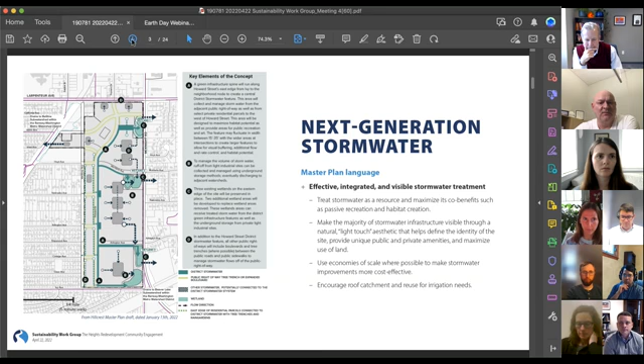Yeah. Bob, do you want to? Oh, I wasn't sure about the map. I don't know that folks are familiar with the concept. The schematic. So explain the schematic in a minute or less. It's like a game show.

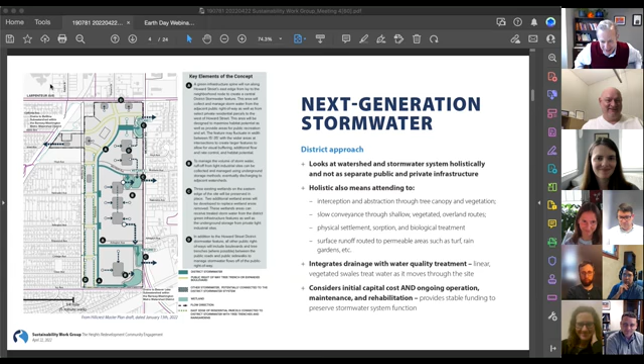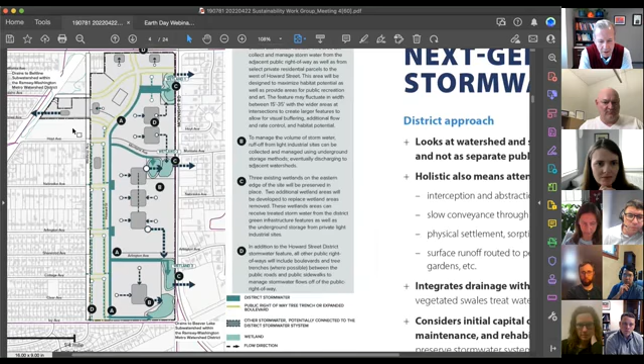I'll try. So, I mean, this came out of the master plan. It was actually to conceptualize what the thematic elements within the system would be. So on Arlington and Howard Street, you'll see a linear feature, and that's really a BMP, right? It's a combined conveyance and treatment BMP. Now, what's interesting about that for us is that by combining conveyance and treatment, we really accomplish two things at the same time. But we do have to be a little bit careful about not overemphasizing conveyance and not accomplishing the treatment we want.

So on Montana, Howard, and Arlington, you see those features. We also have a lot of underground storage. We have a realization that in creating industrial space, there's a certain amount of pavement and building that just needs to occur. And so within the master plan, there was a decision to also indicate the need for underground storage. And they roughly proportion what that might be. Now, underground storage in some locations might have infiltration associated with it. In other locations, maybe not. And we're actually currently looking at where that makes the most sense.

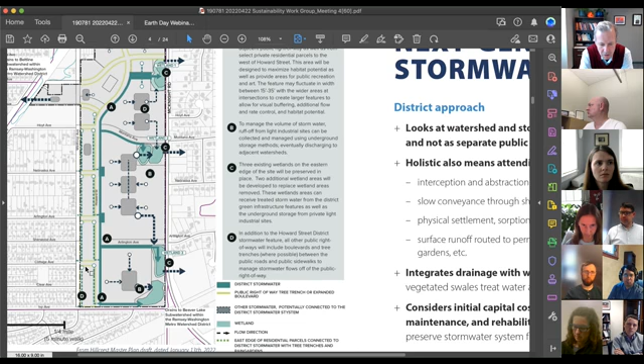Generally speaking, toward the southwest part of the site, infiltration is more available to us. And then toward the northeast part of the site, the east and north, not so much. Now, some of you may say, well, there's contamination on the site. So we are going to have to work with the PCA, the watershed, and the city to understand their tolerance for, after we remove the contaminated soils, are we free and clear to pursue infiltration where it makes sense? And we think that we will be, particularly since some of the infiltration areas don't have contaminated soils.

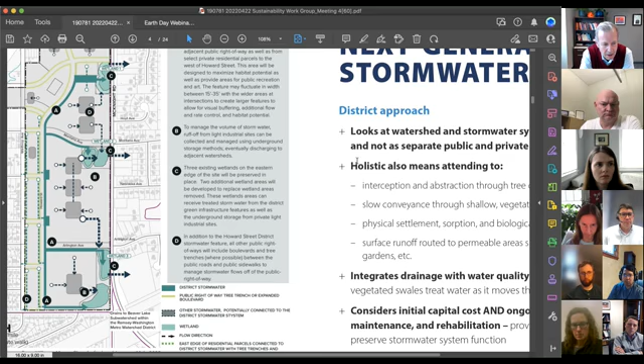So you see those gray areas are really a schematic of where underground storage would occur. And then, of course, we have wetlands on site. And wetlands, I don't say they're not part of the treatment system. Regulatory agencies will say you have to treat upstream of a wetland, but a wetland can serve to polish water, I call it, just to kind of finish it up, to really add an extra level of resiliency to the system. So we do rely on the wetlands to provide those functions, and really we have to maintain hydrology of the wetlands. And then we have surface ponds as well as part of the system.

What's not shown are what I would call the small scale BMPs that will be integrated into the site. And those could be tree boxes, rain gardens, rain gardens in parking lot islands, all of that would also be part of the system and integrated into it. The one concept here, though, as we look at this, is that the public realm and the private realm are mixing their water, right? And that's not always done. And so that's where we come up with the concept of district stormwater.

District stormwater for us is really the idea of what is the most practical way to move water and treat water without thinking too much about the boundary between the public and the private realm. What we're trying to do is be practical and holistic and not so much think, well, the municipal system is here, the private system is here, let's separate them. We're trying to be more efficient to get more treatment out of a certain amount of expenditure. And that lends itself to the district concept.

And a district really means, I mean, it's a philosophy in some sense, but it's also a financial structure. In a district, we identify what those combined costs are going to be in the public and private realm, and we attribute them to the development. And then we make sure the stormwater utility, a special district might be created in the stormwater utility that funds those activities and the maintenance of them long term. And that's really the idea.

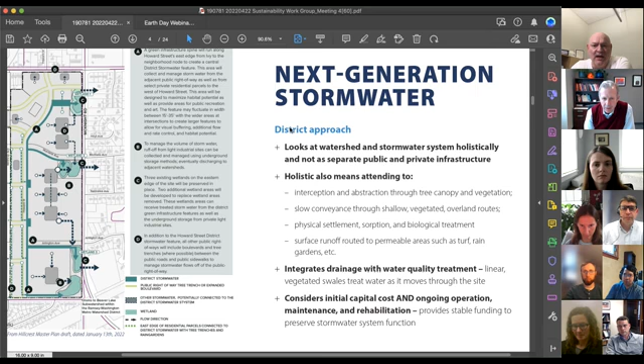Yeah. Should I keep on to the next slide then, Becky?

So we'll talk just a couple minutes about the practices. Every engineer comes at this with a preference for certain practices. We try to be open-minded on it. Obviously, there is large-scale underground storage on industrial sites. That's a very practical way of going about it. At the small scale, we have tree boxes and rain gardens. That's a little bit more of the aesthetic, though there are treatment aspects to it.

Permeable pavements are one that gets to be a little tricky. This is sometimes where the meeting of the minds is; I think we kind of align with Public Works on this, that we haven't had a great record of using them in the highly trafficked right of way, and anywhere where we have a lot of turning movements. They tend to degrade and perform poorly, but there's a place for them in other areas where we might not have a lot of turning movements or traffic, and certainly in plazas and public spaces where it's all pedestrian and bike traffic.

So there's a place for them, and I think what you'll see in our designs as they come forward is that we're not putting them in where we have an industrial development with a lot of trucks running. We're probably not going to be seeing a lot of permeable pavement on the roadways, but we would be seeing it and looking for it in many, many other areas.

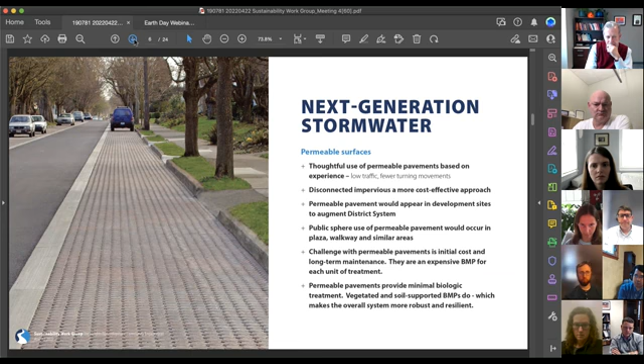You can go to the next slide, Becky, which I think is contamination remediation. Still me. Monty, I didn't know I had this much material. Becky, you really stretched it out.

Thank you. So contamination remediation, I talked about needing to be careful with infiltration when we have contamination. And there's the practical of being careful, right? You have contamination. You don't want to drive contamination into a groundwater table. And so when we do infiltration, we're mounding up water, we're increasing the hydraulic gradient across the vertical plane, right? And we can drive water into sand beds or just veins and then drive pollution deeper into the soils. So we have to be careful about that.

When we can't infiltrate because of contamination, we actually have an augmented water quality standard that we have to achieve by Ramsey-Washington Metro Watershed District standards. So when you can't achieve infiltration, you have to just provide more retention, more volume for treatment. So in areas where we can't infiltrate, we'll have to do that. But that said, we are stripping all the contaminated soil. Most of the sites I work with, we can't get at all the contaminated soil, right? It's deeper down or it's in the groundwater. We're dealing with a plume. So we're stuck, we can't infiltrate.

But here we have access to all the contaminated soil. Right, it's all at near surface. It's all in the fairways and the greens and the tee boxes, and it's within the first 24 inches of the soil. So we do have access to it. So working with the PCA, primarily Department of Ag, city and watershed, we're thinking, in areas where it's appropriate, we can get infiltration into the development.

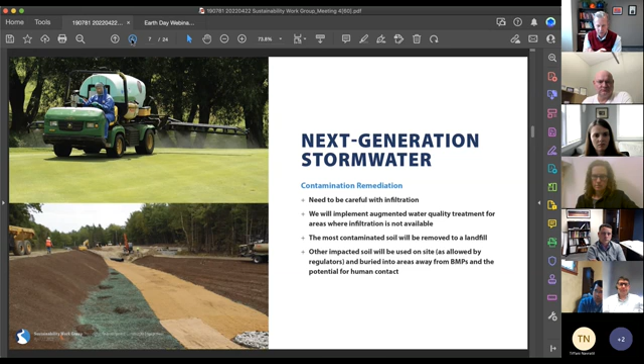Bob, this resilience and adaptation slide, I think, jives nicely with Chelsea's comment in the comments here, wanting to hear about strategies for drought resilience. So if you or Bill, while you're going through this slide, can be thinking about that in the back of your brain, I think that would be great.

Hey, Jess, thanks for joining us. Thanks for having me.

So resilience and adaptation, in terms of flood prevention, our standard is known as Atlas 14. Now, your guess is as good as mine as whether it's getting rainier over the period of record that Atlas 14 is based on, but it is a 7.4-inch flood event, and has proven to be robust. Bill and I have had probably, Bill, 5 years of experience now applying the standard. So we've seen some of the infrastructure built that we've used to design to this standard, and so far so good, right?

We used to design to the 6-inch event. Some areas of the metro was 5.7 inches. So it is quite a bit more robust. So that resiliency is there. The other thing I was just going to say, Bob, we could add in, flood protection in where we put flood storage areas or define flood storage areas is a component of resilience. But another component of resilience is just in best practice of site design, right?

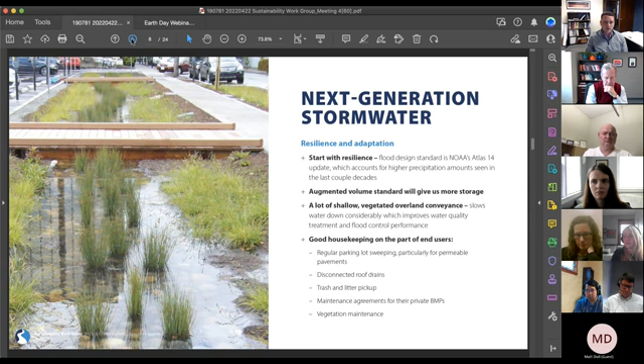Like if we put something underground, are we putting the appropriate number of clean out structures or access points? Can somebody get in and maintain it to continue? Because spending all this money on infrastructure that only lasts 5 years and then becomes ineffective doesn't achieve anybody's goals. And so using that O&M lens and asking those questions of the crews who are out there maintaining them, how can we design this differently or better, and keeping how they're actually going to keep these things operating in mind is important.

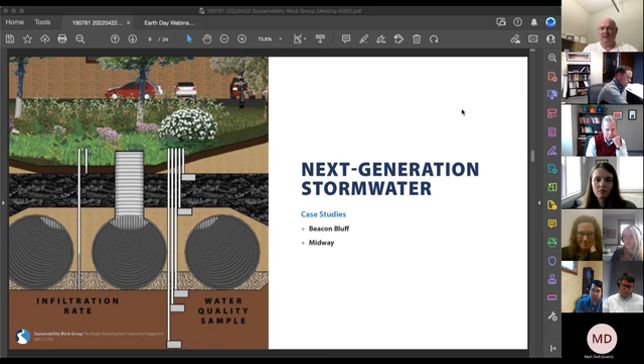Thanks, guys. I'm going to fly through a couple of case studies here. Let me just open them up. And Monty, I'd say we are running a little bit behind, so if you want to speed through them.

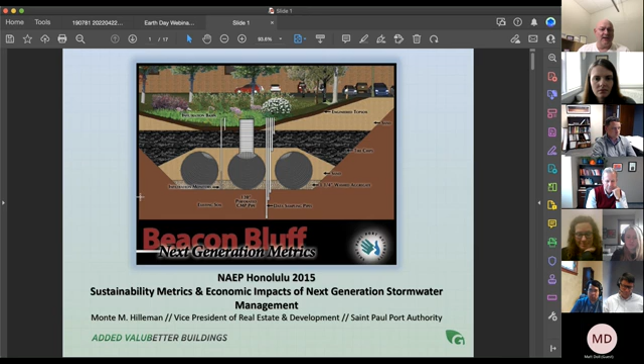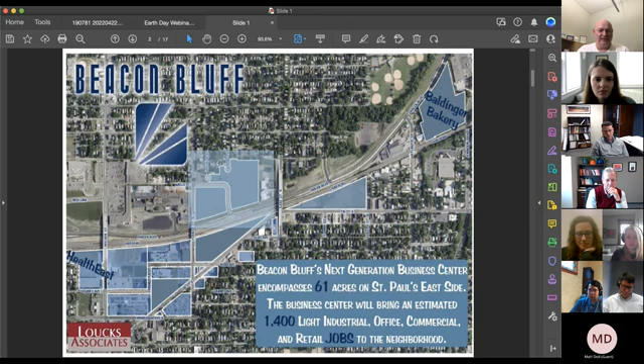I will be quick. 2 different projects, our Beacon Bluff project and giant utility scale system, and then an industrial scale system at our Midway project. I haven't done this slide for a little bit, but this was a presentation I did for the National Association of Environmental Professionals in Honolulu in 2015. Beacon Bluff was our last 10-year large-scale redevelopment project, 1,400 jobs on 61 acres. This is the site we're going to drill into right here.

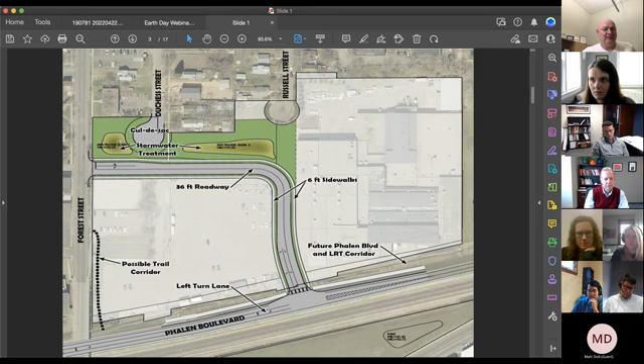There were some old 3M buildings, and a contaminated foundry was buried under these old 3M buildings we had to clean up. We had to build this road to create 2 nice development pads. And to build the road, we had to build some treatment to deal with the stormwater coming off the road. Well, what we realized was, right about where that treatment wanted to be was the creek bed of the old Phalen Creek that was eventually buried and put into a brick tunnel that drains right into Swede Hollow Park and then right into the river.

What we realized was this is all down gradient. The Beacon Bluff site is down gradient from this 143 acre sub-watershed district. So this is 143 acres of largely residential, small scale commercial, basically untreated urban runoff that was going into bigger and bigger pipes. By the time you got down here, there's a 4-foot pipe that went into the 8-foot brick tunnel from 100 years ago and dumped right into the river.

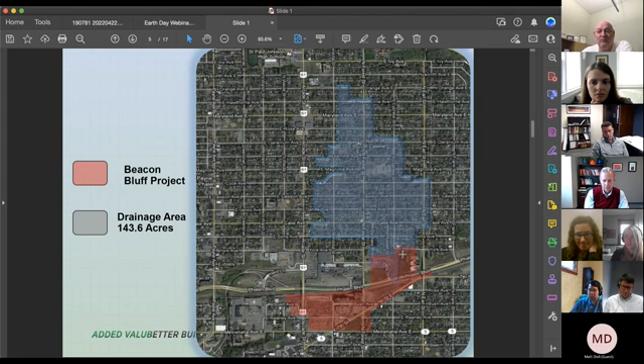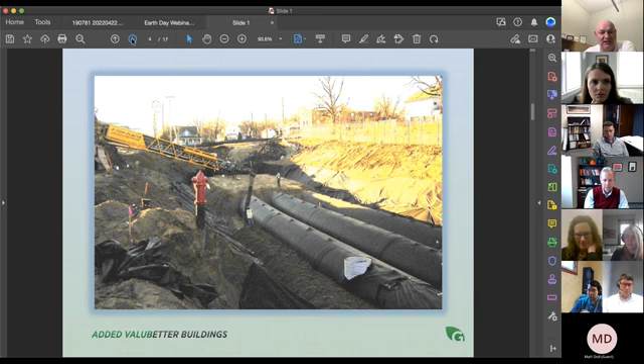Well, that creek bed was some beautiful sand we could infiltrate into. So we built this utility scale underground infiltration system and got the city comfortable with it. The storm sewer folks were not super excited about it at the beginning, but we got them there. It is perforated 10-foot diameter pipes, wrapped. Different types of soil media were used, sand and aggregate, to both hold up the pipes and to provide filtration.

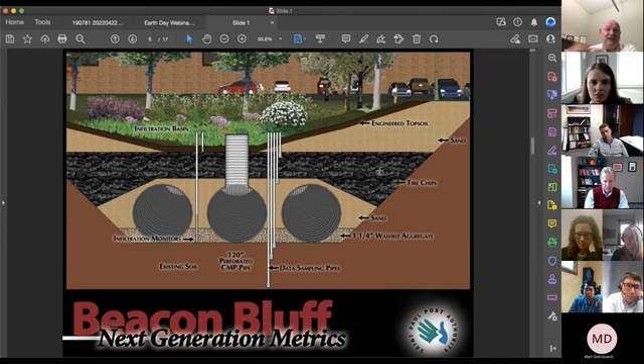Tire chips, what's called TDA, tire derived aggregate: there's a PCA standing beneficial reuse for tire derived aggregate as a waste product. And if manufactured to a certain spec rather than put in a landfill, it has a lot of void space, so you get a lot of storage capacity in order to, as Bob was saying, slow down that 143 acres of runoff in a surge event. And then it's all infiltrating down into the beautiful sand below the system.

But when we were trying to get this thing permitted, we were having some issues related to policy and science about how we understand how stormwater works. There's really a dearth of data internationally about how these underground systems perform over time and what the environmental efficacy of them is. And so we went down a rabbit hole that we're still going down on researching, providing research opportunities to create better policy around stormwater.

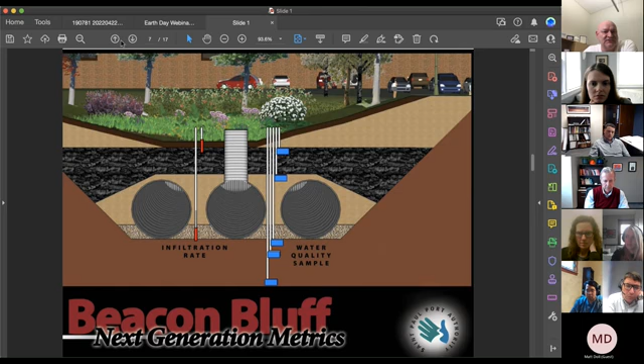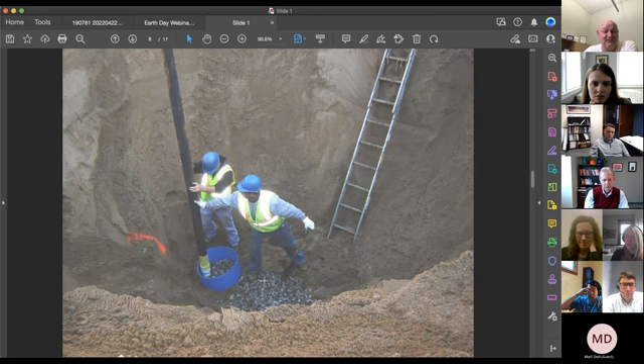We inserted infiltration rate monitors, these collection tanks for water quality sampling, these things right here. I mean, where'd they go? Oh, they're coming up. We literally invented these sitting in the construction trailer, trying to figure out how to get these pipes and get the water, collect the sample we need. This thing, the bottom one, is like 12 feet below a system that is 20 feet below ground. So you were never going to be able to build this after the thing was built. You had to build these deep sampling pipes ahead of time.

This was the first site to use a SAFL baffle. It was invented at the University of Minnesota at the St. Anthony Falls Laboratory, hence SAFL baffle. It's a stormwater device you put in a manhole. I liken it to shooting a garden hose at a cheese grater. It really disperses the energy, and Bob and others will laugh because that is not actually how this thing works, but kind of. It interrupts the scour, the swirl in one of these manholes, which picks up the sediment and pushes the sediment downstream. That's what these SAFL baffles do. This, like I said, was the first installation, and I believe this is now standard practice at Cap Region Watershed District to require SAFL baffles in manholes to some extent.

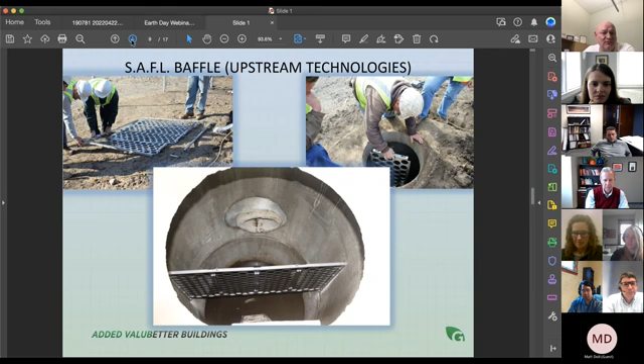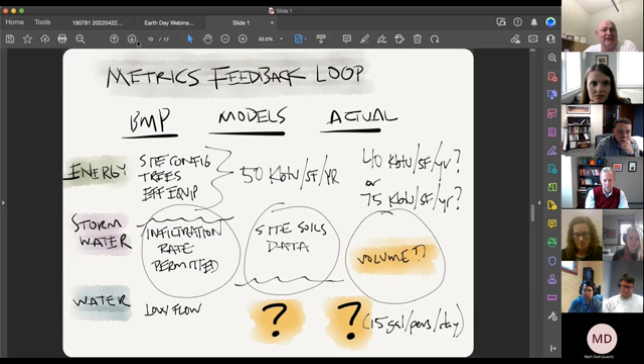This is a whole thing about metrics feedback loops and the idea that we have BMPs that say we're supposed to do good stuff with stormwater by infiltrating it. We do modeling and we get some site soils data, but then we don't do a lot of actual metrics. Cap Region Watershed District has several monitoring sites. Two of them are ours. Ramsey, Washington, where this watershed district, where this site is located, I'm not sure. We haven't gone down this rabbit hole with them. But it seems to me that most watersheds are interested in sites where they can monitor and analyze and get real world metrics feedbacks from these types of systems.

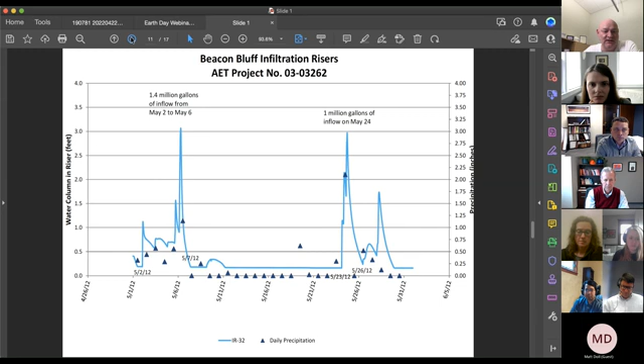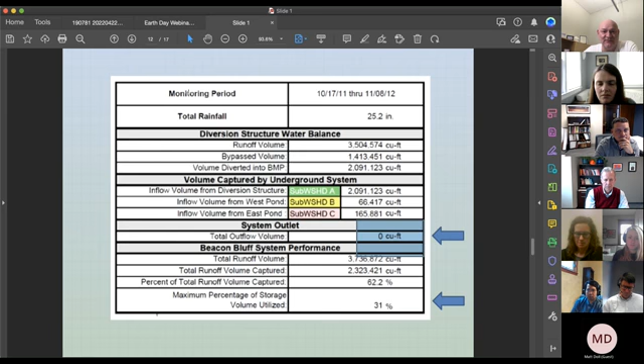This is our infiltration rate monitoring. You can see that in one day rain event, we inflowed 1 million gallons in that system on May 24th. And this was 2012, it looks like. You can see here the system outlet, total outflow volume, 0 cubic feet, meaning everything that came into that system was being infiltrated and recharging the aquifer. So when we talk about stormwater, we talk about ecosystem services. And what are the valuable ecosystem services that stormwater help us hold up? Aquifer recharge is a big one, right? Water quality.

This next slide will talk about the speed by which we are transferring surface water contaminants to groundwater. And these are things that I didn't understand when I started working on this stuff, but some of the folks at St. Anthony Falls Lab and some of the other scientists have taught me a lot about, and we got into a partnership to study these systems. Now we're working with the Pollution Control Agency and the Watershed District, where the PCA is providing lab time and lab analysis. The watershed is providing the labor to go collect the samples. The Port Authority is paying for the instrumentation of these systems.

So the University of Minnesota, Met Council spent, this is Dr. Gulliver's work, Met Council spent about 400 grand with U of M studying this system. I tried to present this to the National Association of Environmental Professionals, not being a scientist, but we wonder, right, about the performance-based justification for these BMPs, for this infrastructure. You know, there is policy and there's practice, and at a policy level, infiltration's good. How much infiltration is good? How much sand do we infiltrate through to accomplish what environmental water quality goal? These are tough answers because there's not a lot of good data.

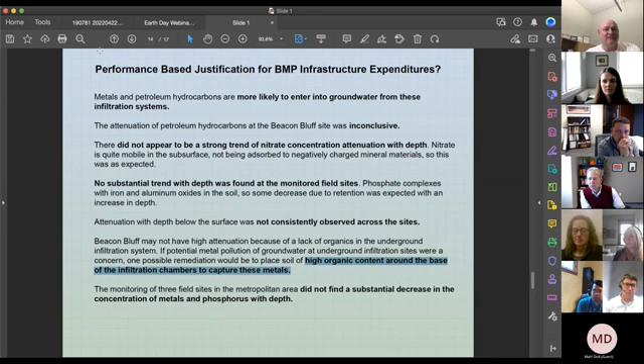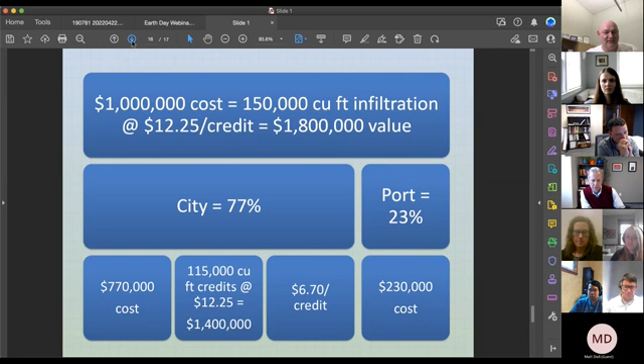This was just a whole mess of a calculation by which we saved the city about $500,000 by selling them infiltration credits for 50 cents on the dollar. And we won a bunch of awards for it. So I just wanted to introduce you guys to this idea of these research stations. And we haven't talked about doing that out here. We don't have potentially a huge infiltration gallery system like this. But I think this is the type of work that helps us move the industry forward and helps us move our understanding of these BMPs forward.

Selfishly, from my perspective, the initial toe in the water was, hey, that Phalen Creek bed out at Beacon Bluff, the dual ring infiltrometer test says that sand is going to drain at 20 inches an hour, but the watershed only will give us a permit as if it drained at 2 inches an hour. So are we building that huge system? You saw that tiny little person standing on that huge system. Are we building that system 10 times larger than it needs to be? I mean, talk about resilience and redundancy. That seems a little ridiculous.

But we did ask the watershed back in 2014 or 2010, whenever it was, well, how come only 2 inches an hour? Well, because there's not enough data. We don't know how this thing's going to function in 10 or 20 years. So we're going to be conservative and give you a permit for 2 inches an hour, not 20 inches an hour. So just want to put that on the table.

If folks are interested, there's a whole other world of science that this site could participate in. And I think it's at least worth approaching the watershed district, Ramsey, Washington, who I'm less familiar with, about some of these ideas and seeing how game they are. But I know from experience, Cap Region was all over doing this kind of stuff.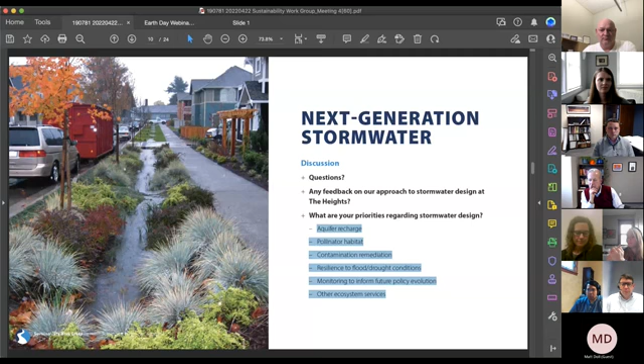So this is what we wanted to get to today: at a high level, what do you guys think we should be accomplishing with stormwater at the Heights? These are some of the ecosystem services that we know can be impacted and we can influence positive outcomes on. Are there things that are resonating with you guys after seeing this stuff? What do you think?

Chelsea? Hi. Thank you for the presentation. I've learned a lot, and just anecdotally as somebody who lives in this neighborhood, last year I was really excited to see a lot of new trees planted because with emerald ash borer, a lot have been cut down. We lost a lot of trees. And so I saw a lot of trees planted and I was very excited about that. And then we got the drought. And I don't know how that affected especially the young trees. I know that's very stressful. And so that's why I asked the question about drought resilience as well.

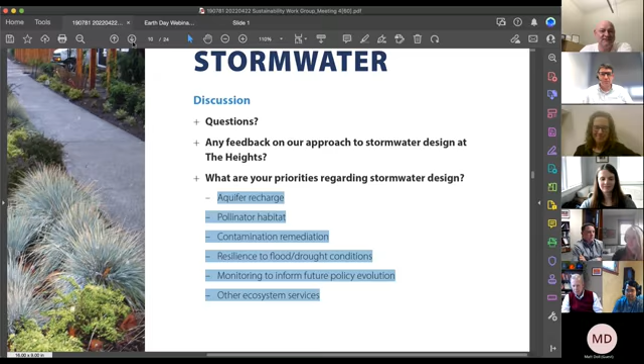Going once, going twice. All right, Becky, let's talk embodied carbon. Yeah, and in terms of a time check, I think we better go through embodied carbon pretty quickly. Monty, how do you feel about postponing the workforce section until next time? And then we will try to save at least 5 or 10 minutes to talk about next steps, because that has to do with a couple of things we'll be asking you to look at between now and next time.

And Bill and Bob, you are welcome to stay on if you would like to, or you're welcome to hop off. Embodied carbon is a very, I guess not exciting to everyone, but a very exciting topic. All right, so. It is interesting, but I will sign off. Thank you. Thank you for your time.

Thanks, guys. Bye. So embodied carbon was one of the other topics that we heard work group members were interested in hearing more about. Just so that we're all on the same page, embodied carbon is the emissions that are associated with materials and construction processes over the whole life cycle of a building. So it includes mining or harvesting the raw material, manufacturing that product, transporting it, using it, and disposing of it.

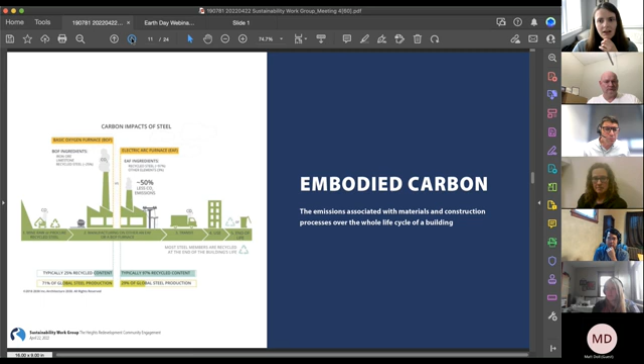And different materials have differing levels of emissions at each one of these life stages. And decisions made can impact the overall emissions. So in this example here, using a basic oxygen furnace versus an electric arc furnace to manufacture steel can result in a 50% drop in the embodied carbon. Similarly, transit distances, end-of-life disposal methods, and that type of thing. On the next slide, we'll talk about why it matters.

So the pie chart is showing that about 20% of global emissions come from building materials. And the chart below shows that about half of total new construction emissions between now and 2050 will actually be from embodied carbon. And in the near term, about 2/3 of the carbon emitted from new construction of highly energy efficient buildings between now and 2030 will be from embodied carbon.

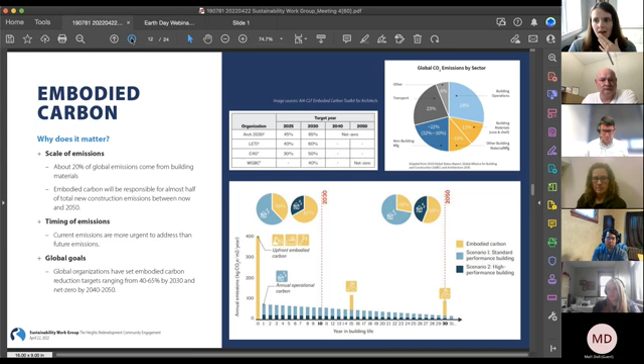So it definitely is an impactful area and matters especially in the short term as we're approaching this tipping point for catastrophic climate impacts. I'll kind of skip over. Global organizations have set a variety of reduction targets that you can also see on this slide if you want to revisit those.

I will also just say that embodied carbon has really come a long way in terms of what we know about it over the past 10 years. And so there are now many more strategies and tools for quantifying embodied carbon and reducing embodied carbon, but it's definitely an area that's still ripe for innovation and ongoing development. And so that's informed the goals for this project, the first one of which is to quantify the community's embodied carbon impact.

So we are recognizing that when we're talking about carbon-free community, that definition is looking at once the development is fully built out, which is missing this major source of emissions. So we want to be able to quantify this so that it can become part of that narrative. We also are looking to raise awareness of this topic on every project to help move the industry forward in addressing embodied carbon, along with capturing any low-hanging fruit that is accessible across the development for easy, low-cost strategies to reduce embodied carbon.

In addition to that, we're hoping to make meaningful reductions in high-impact areas, so looking at the building types and systems that have the biggest impact on embodied carbon emissions. And then ideally, we'd like to include at least one demonstration project that can really inspire and inform future change. And this is where hopefully at some point, John Metza will be able to share some of his ideas about this.

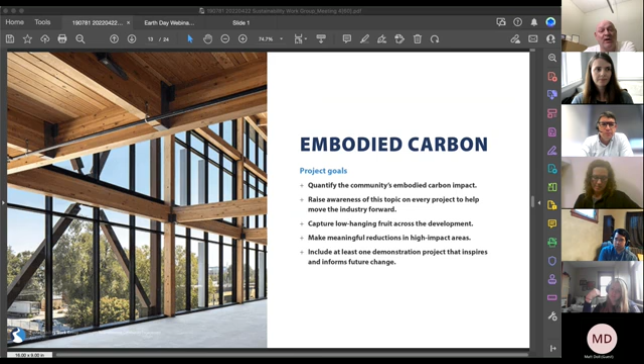But these industries are starting to get smarter because people are starting to spec these type of LCAs, these type of life cycle analysis into their building projects. And at this point, we do have sustainability covenants, and maybe we're going to get there, Becky, that talk about requiring an embodied carbon analysis for these buildings. Mm-hmm. Yeah. So I'll quickly address some of the areas of biggest impact.

In general, materials like concrete, steel, aluminum, plastics, foam, refrigerants, and even some interior materials like carpet and gypsum board. There's opportunity in each of those. In terms of building systems, the structure and exterior enclosure, so the two darkest gray bars at the bottom of each bar in that bar graph, have a larger initial impact than interior finishes and building systems. I will note that as those interior finishes and systems components get replaced over time, they do have additional embodied carbon 5, 10, 15, 20 years into the life of the building.

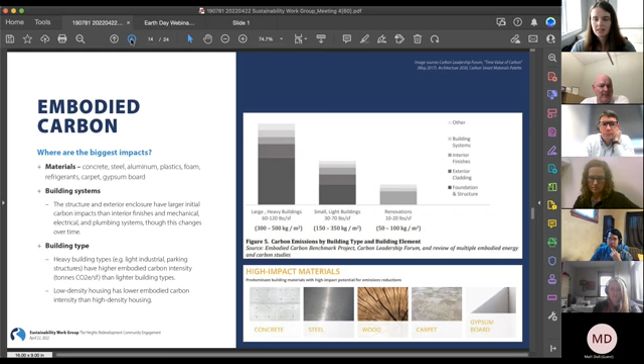So they do add up over time. It's just not as big of an initial impact. And then just in terms of building types, heavier buildings typically have higher embodied carbon intensity than lighter buildings.

So there are strategies to address this, and a recent report from the Rocky Mountain Institute found savings possible of 24 to 46% at cost premiums of less than 1%. So a couple big picture strategies: build less, reuse more. The biggest opportunity for the Heights, which is new development, is designing for disassembly.

Another strategy is to build lighter and smarter. So this bottom image is a prefabricated modular housing approach, which can really reduce construction waste. The top image shows using life cycle analysis to optimize the building envelope in this case. So the design team was able to greatly reduce the embodied carbon while maintaining other design criteria like appearance and insulation value.

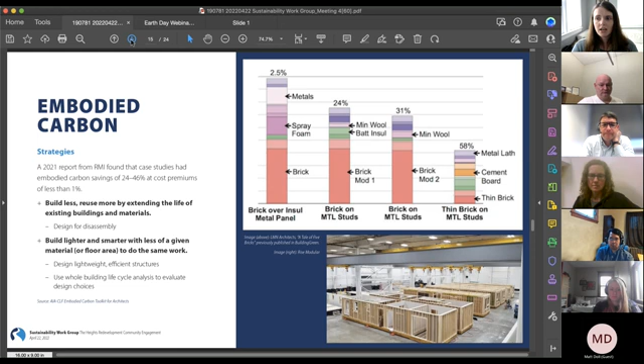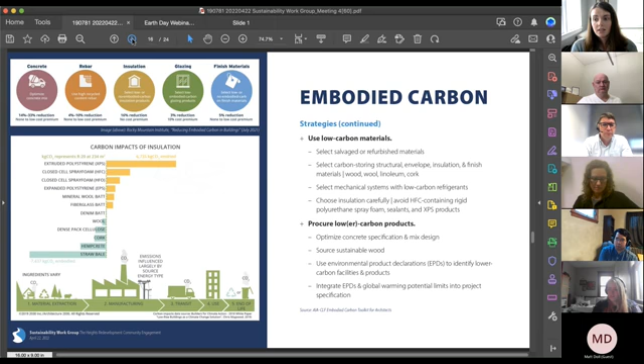And then once you've kind of settled on what materials are going into the project, you can procure lower carbon products. So Monty was talking about the ability to dramatically reduce the global warming potential of concrete through the concrete mix, and that can be specified in the project specifications. Environmental product declarations can be used to identify lower carbon facilities. So remembering the difference between the two types of furnaces to process steel, those EPDs and global warming potential limits can be incorporated into project specifications at a relatively low or no cost to the project.

So looking at how this is integrated into the Heights currently, the master plan calls for the project to model embodied carbon for all construction and use materials and techniques that lower it to the greatest extent feasible. The way this is incorporated into the draft covenants is that buildings other than single family homes will need to conduct a life cycle assessment of the structure and enclosure, which remember were the biggest components of embodied carbon, and then evaluate the feasibility of reducing global warming potential by 5 to 10%. And this is based on language and methodologies from LEED's Building Life Cycle Impact Reduction Credit.

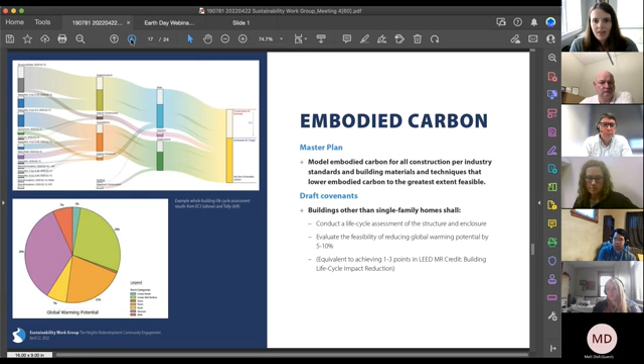The idea would be that with this assessment, plus during design team meetings with the port, some education and providing resources about those low-hanging fruit and high-impact strategies, developers would be on board to make a difference in this area. So the next slide shows that approach of requiring assessment and evaluating reduction potential, encouraging high-impact and low-cost strategies through education, and just a reminder that the covenants are focused on the structure and enclosure rather than mechanical, electrical, or interiors, although those topics could certainly also be raised in the design team meetings.

So if we could just take a couple minutes at this point to hear any immediate feedback on your thoughts to our approach on embodied carbon at the building scale. I know it was a lot very fast, so you can also take some time and get back to us via email. But any initial thoughts?

Russ, I can't remember, does the city sustainable building policy get into embodied carbon or not? I don't believe it does, Monty, yet. I think this came up briefly in some conversation recently, but I think we're maybe due for another update soon.

Well, we are trying to understand the impact in the marketplace of requiring a life cycle analysis for embodied carbon. That's a new one for us. And so LHB has been pushing me, and I've been pushing back and trying to make sure we can keep people on the bus here in terms of building buildings and bringing their jobs to the Heights.

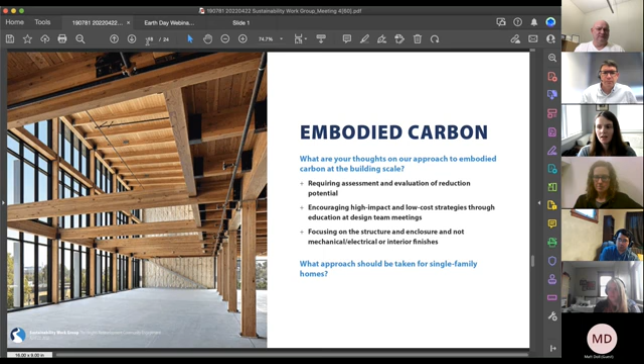Should we keep rolling, Becky? Yeah, I think we can.

Oh, this is going to be John's slide. I can just tell you because there was a note on one of the other slides about sustainable sourcing, sustainable wood. And John Metza, who's on this work group and is a business owner in the area, wants to build a building at the site. You've probably heard him say. We helped sponsor a grant application. The Sustainable Forestry Initiative wrote a grant to USDA, and the port's responsibility in that grant application is we said we would encourage mass timber with our covenants, specifying it as an eligible and preferred material for construction, et cetera.

And John Metza was in that grant application because hopefully, I can't remember if it was a couple $100,000 or something, it would actually help pay for the cost differential for him to build a mass timber net zero building on site. So we haven't heard back about it yet. I'm sure I would have heard if we did get the grant, or if we didn't for that matter. And Sustainable Forestry Initiative, you may know, is kind of the industry's attempt to keep up with the Forest Stewardship Council, who are the more activist advocate types.

But I do know the person at Sustainable Forestry Initiative, Annie Perkins. I've been on the U.S. Green Building Council board with her for years. She was at Andersen Windows before that and has done great work in the sustainability field. So at least I know she's not a shill for the industry, but they are trying to make progress in this low carbon mass timber construction. I was at a meeting over at T3 in Minneapolis the other day, and it just is such a warm, beautifully aesthetic material. And it does such great things with carbon. It'd be great to see more of it.

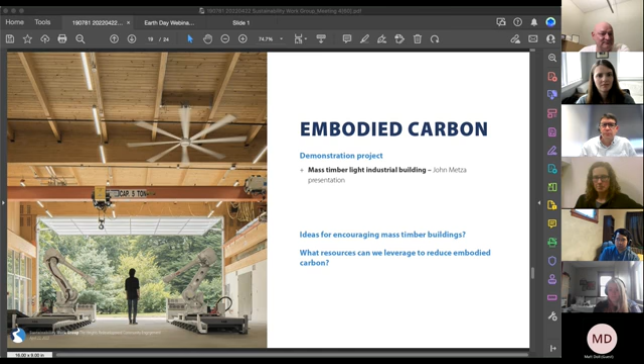Workforce, we're going to skip for this meeting. And next steps. This is what we wanted to talk about before we wrapped up here today, right? Yeah. Why don't I start, Becky, and you remind me if I forget something. So we were having a discussion about what the work product of this group would be. And we're hoping that we can get to a point by the end of these sessions to have a set of consensus recommendations. Maybe it's a short 2-page memo that everyone in the work group can nod their head and agree with and live with, that documents this group's top sustainability priorities, the things that you really like and want to endorse or support that we're doing, and also areas that you think we need to go further on, or areas of concern that you don't think are being addressed. And we will obviously take those things seriously and do our darndest to make them happen.

The timeline for this: we don't have a meeting on the 29th. I think maybe, is this via email they're supposed to do this? Yeah, we were thinking this would be a 2-part homework where by next Friday, each work group member, and we'll definitely have to communicate this quickly to the folks who aren't here, would propose topics to include. So whether that's just 'love the next generation stormwater district approach,' could be as simple as that, or it could be more detailed bullet points or paragraphs or sentences that you'd like to get into the draft. We have a pretty quick turnaround for our team to create the draft document based on those proposed topics and potentially other things that we've been hearing at these work group meetings.